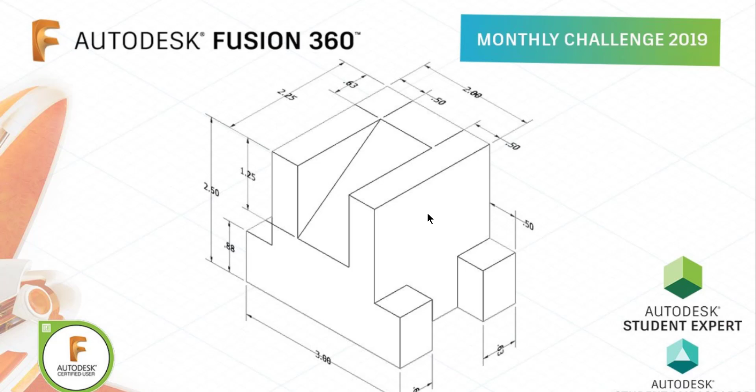So let's start it. This is our challenge and we are going to complete it very easily in Fusion 360. So let's start it.

Go to Fusion 360. So first of all, what you do? You have to go to the document settings and change the centimeter to inch. Do it okay.

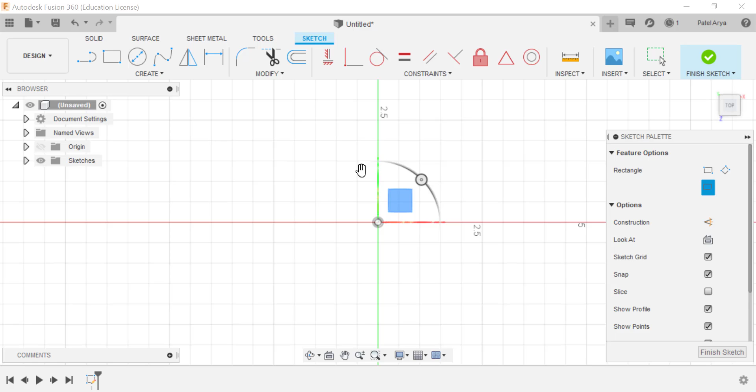After doing okay, go to the top view, then go to create sketch and select plane and press R, or you can select from here and go to center rectangle and make a rectangle of 2.25 this side, press tab and write 2, and do it. So we'll get this type of rectangle.

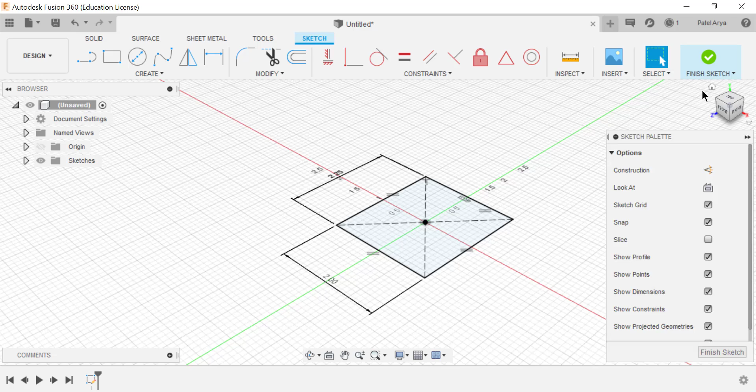Now go to the home view, press E to extrude, and extrude up to 2.5, then enter. So we will get this type of 3 models to a rectangle, and looking this by a dimension photo we have to create.

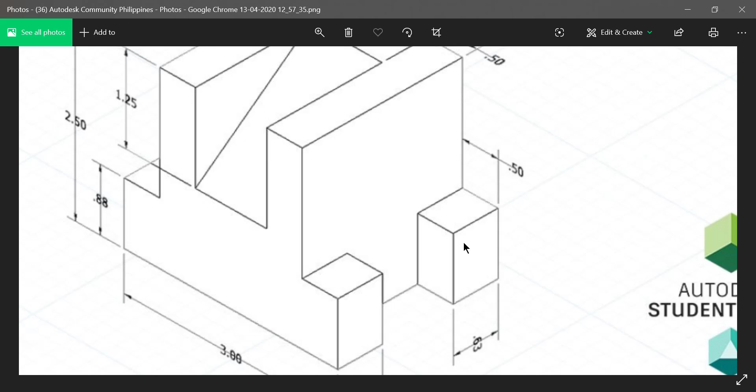So let's zoom and see it. Here we have to create this part. Okay, so let's create it.

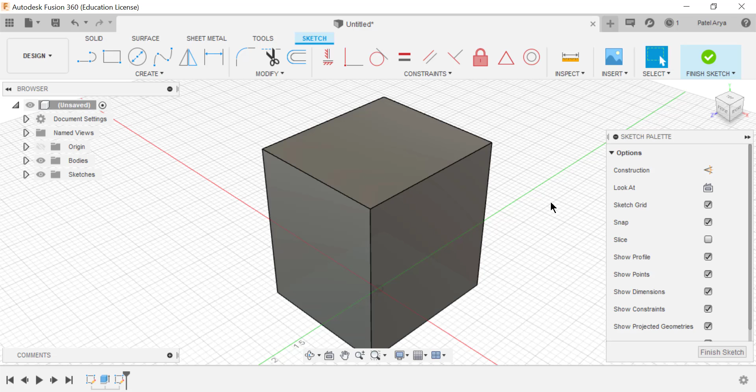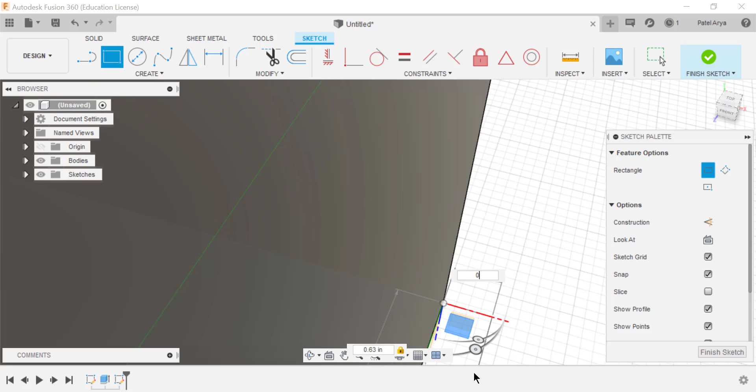Now press R to select 2-point rectangle and make a rectangle of 0.63 on this side, pressing tab to write 0.5, and enter. When you complete, you will get this type of rectangle with the same dimension.

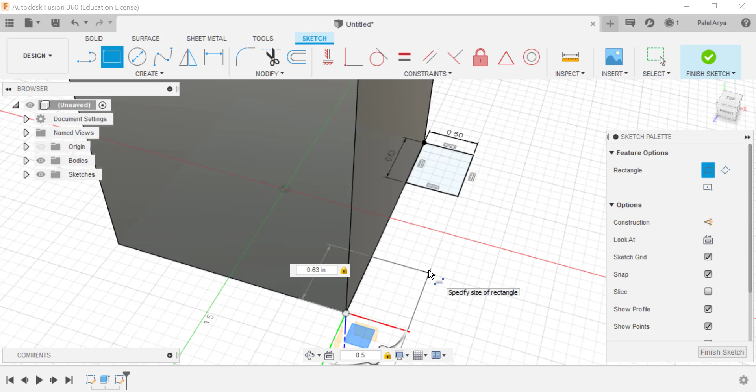We have to create the same rectangle from this point. So rectangle, okay, this way. So here I am writing 0.63, pressing tab 0.5, and I have done.

So making dimension shorter, okay no mind. So we have to extrude this part. E to extrude, like this, and you need to write minus 0.8, and do it okay.

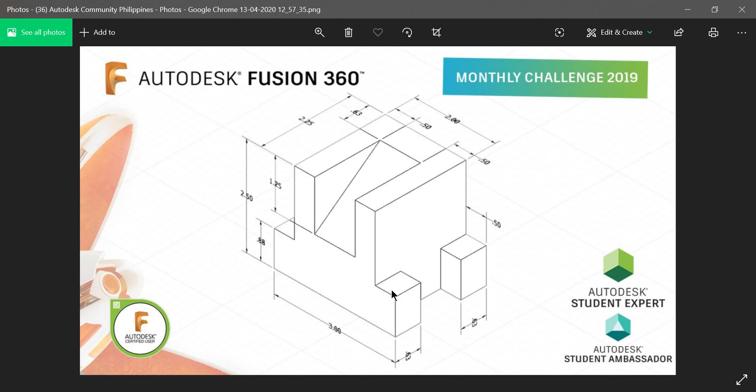See, we get it. But on the other side also we have to make it. For that also it's a very easy way, so I'm using the mirror command.

You can go to create and you will get this mirror command, or you can press S and search MI and you will get the mirror command. Now we need to go to this pattern type to the feature.

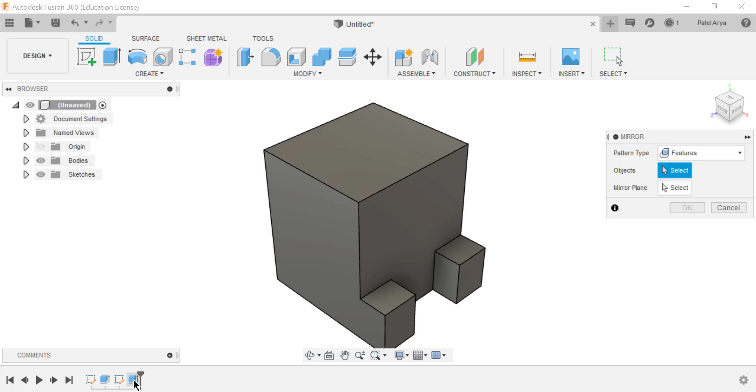So here we get it. See, simple. I will show you a little bit. See, okay. And now what we have to do, we have to make this part also.

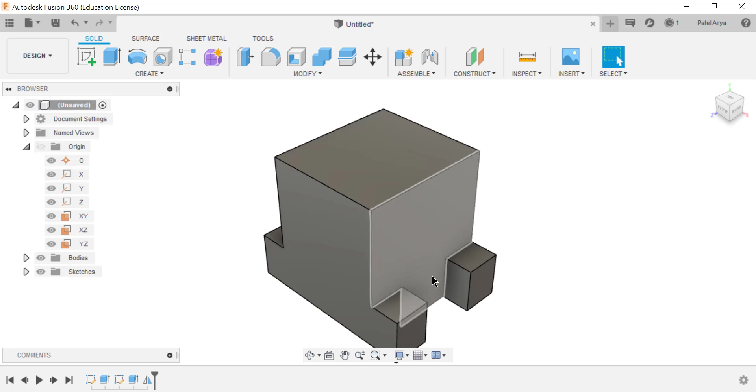So let's create that. For that I'm going to just create the YZ plane, it's like right view, and I'm making this slice this way. So I'm making this line and making a line from this to this point, then escaping.

For the condition, my condition is this point and this line, so it would merge to this. Then again this point to this line and we will merge it. For here you will see it became outer.

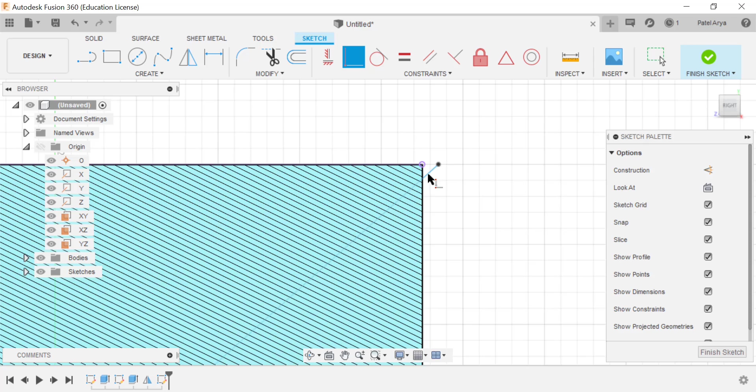It's a problem. For that I will show you, it is very easy to solve it. For that, what you do? Slice is the build option.

Why slice is tick marked and it's not, so now slide this line to make it very little bit closer to this object, this way to make it. See, make it a little bit small triangle.

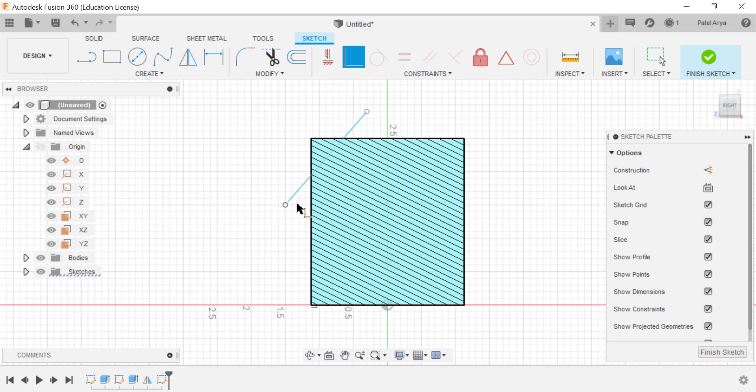Now you can use this condition, selecting this point and this line, and this point and this line. So you will see here it became here. See, so this is a trick, a very easy trick, and you can solve this problem.

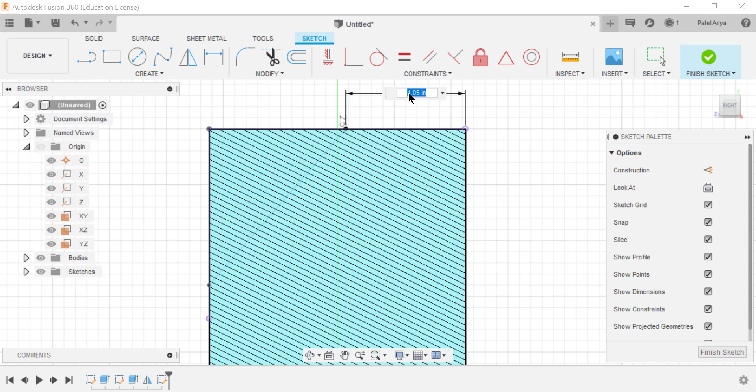Now to give the dimension, I am taking this point and this point and giving a dimension of 0.63, and we hit enter. So you check its dimension. Now another dimension from this line to this point of 1.25, and hitting enter. So we get here.

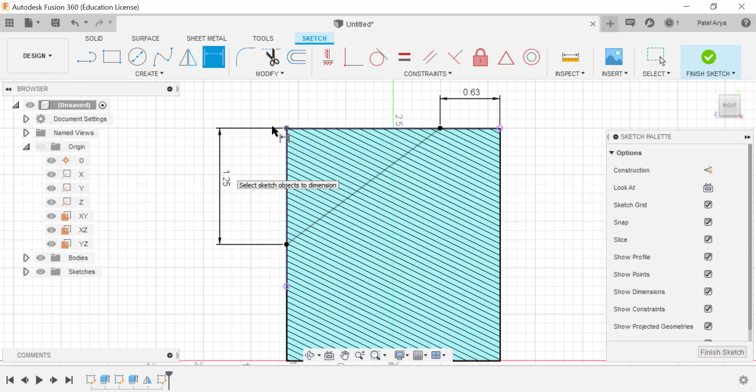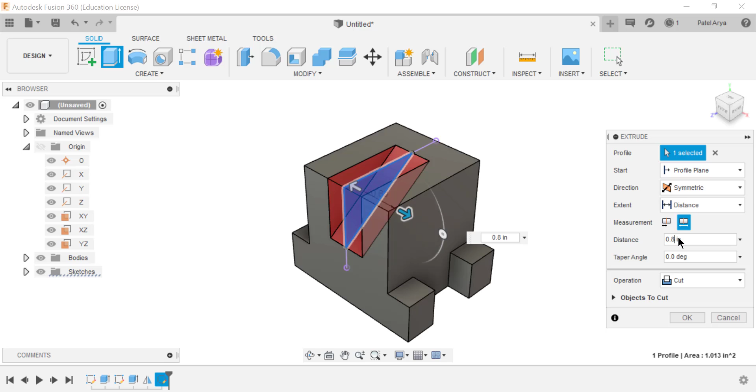Here for direction you select this symmetric. From here to measurement you select this whole length, and here you have to write 0.8, and now you can do it. We need the operation to be cut. Okay, now you can do it.

Okay, see, so by now we have learned how we can complete the monthly challenge easily in this video.